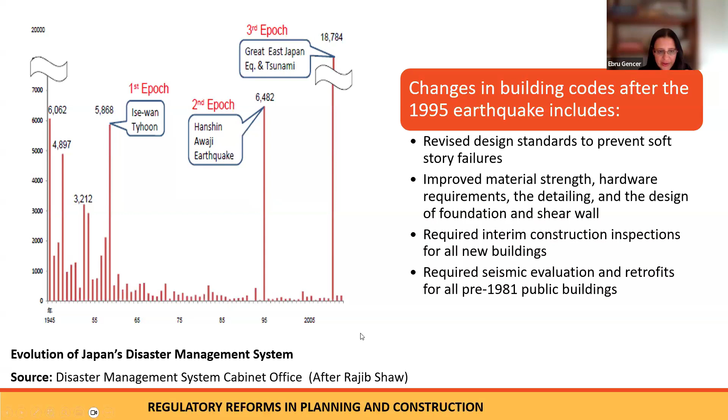There's always some learning and what it means. The institutional structures change. There are regulatory reforms, including building codes, urban planning, and so forth. So the first thing they did after the 1995 earthquake was revisions in building codes and institutional and regulatory structures.

An example of these changes for soft story failures and so forth is this municipal building. As you can see, the middle floors of the building had collapsed, and this is now the base of the building where they were able to make it more resilient.

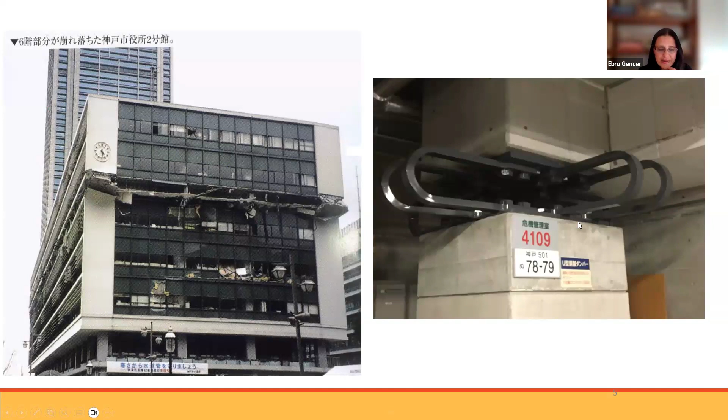Another important aspect of this reconstruction after the earthquake in Kobe was the vision, the component of governance. The mayor, just 9 days after the earthquake, was able to establish a basic vision for reconstruction for the city. I think that's a very important issue.

They wanted to build back better, not just reconstruct Kobe as it was before. With this vision, they really wanted to transform the city and have an idea of what type of city they wanted in the future. They wanted Kobe to be safe, to attract both local and international finance and collaboration, and for the city to be vital while believing in cooperation.

This cooperation wasn't just with international organizations and other partners - they said the multi-stakeholder component was really important for them. They wanted to involve communities in the planning process.

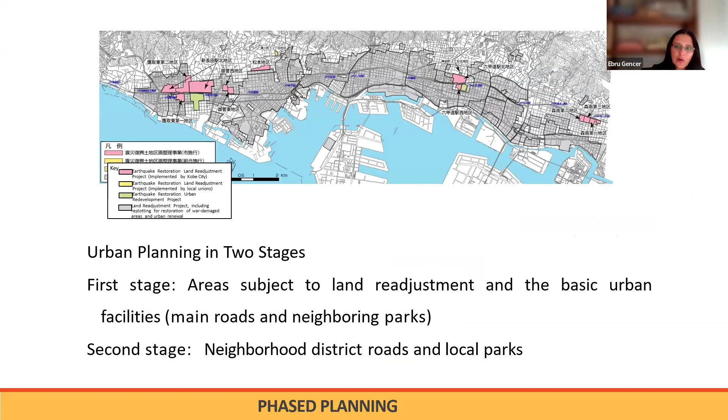For the urban planning of Kobe after the earthquake, they did a phased planning process. They started with infrastructure, since highways and so forth had collapsed, beginning with infrastructure development and land readjustment as the first phase. The second phase focused on more local parts, neighborhood districts, and so forth.

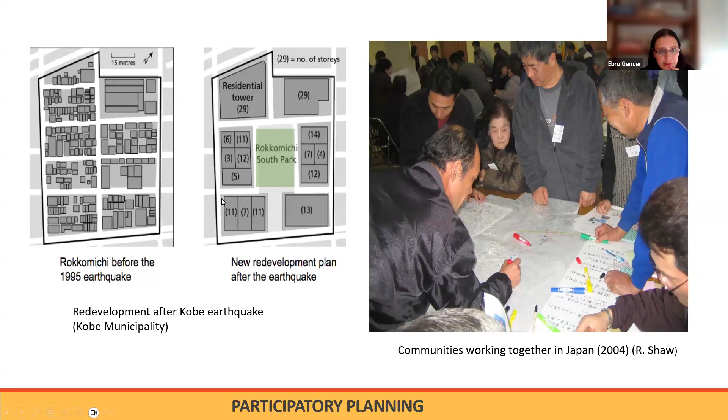An important aspect of this planning process was that it was participatory planning, with communities working together in Japan. Here is one of the neighborhoods that had burned down because of the narrow streets and old timber houses. In the redevelopment process, the neighborhood worked together and land was given to this effort.

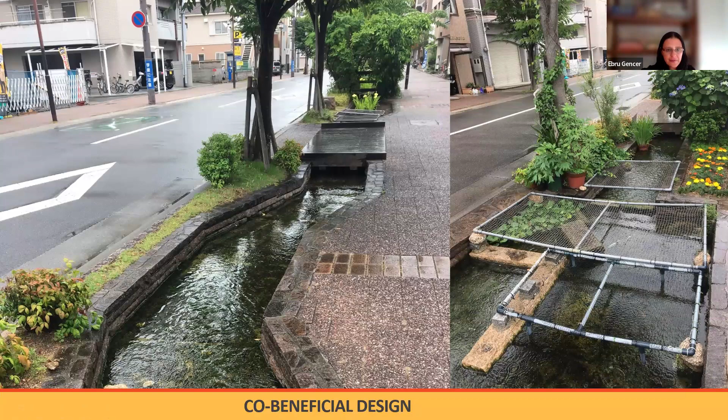So just a couple of points from this. To build back better is to understand the complex and dynamic nature of risk - this is one of the key aspects of building back better, because it's not, for instance in the context of Turkey, just about building back for earthquakes, but understanding different types of risk and different types of stresses and problems in the community.

Decision makers and policy makers need to commit to making transformative changes. However, building back better requires multi-stakeholder participation in all stages of planning, not just at the end for approval.

While there are international lessons learned, just in the Kobe example, we also need to take into consideration that each context, such as Hatay in Turkey, has different governance systems, different cultures, spatial contexts, and technical and financial capacities. So we can't just export these ideas, but we need to see how they could be fit for use in the context where we use them.

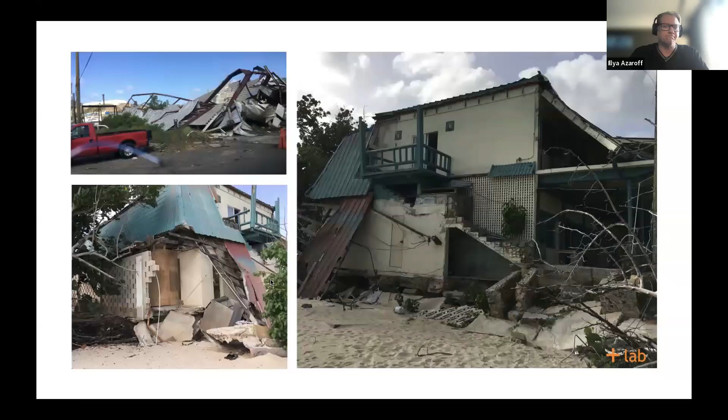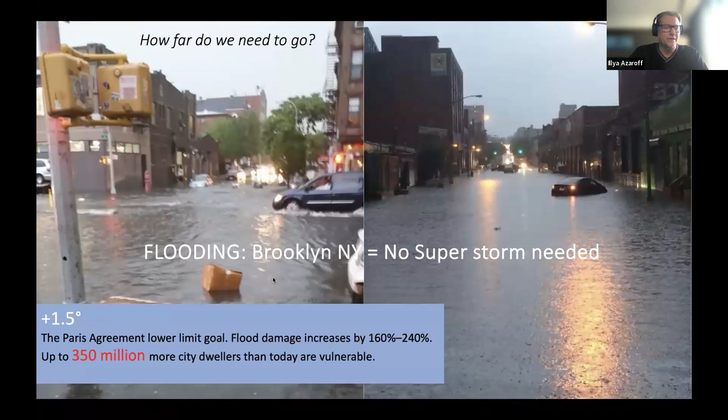I don't have to tell all of you that we're all in the same storm, and we really need to understand the nature of the storm to navigate it. This is about all hazards: enduring shocks and stresses from hurricanes and tornadoes to tropical storms, flooding, and drought, as well as addressing resource stresses that often follow a disaster, from earthquakes across the world—whether in Turkey or Nepal—with the loss of housing and infrastructure, the loss of community and livelihood, and noting that chronic events are increasingly more common, placing millions of more vulnerable people around the world at risk. We've agreed to 1.5 degrees Celsius, and that's 350 million more vulnerable people around the world. So this is the storm that we're all in.

Every minute of every day, 24 people are displaced around the world, from here in Istanbul to all across the world. Last year alone, we topped over 100 million people displaced for the very first time, including the folks in Turkey. That was at a total cost of $236 billion just last year.

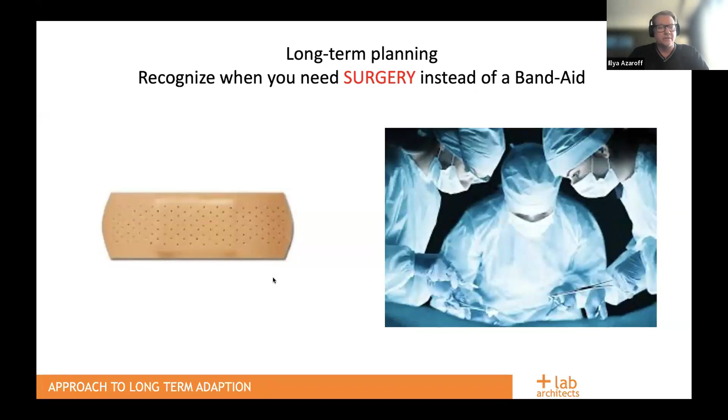I was asked to reflect a little bit on the recovery after the 2023 earthquakes in Turkey. There's a great deal of good work going on, creating temporary shelter for people and trying to bring cities back very rapidly. But sometimes rapidly gives us serious issues later on. This is the first disconnect in understanding two serious things, some of which were alluded to in the first speaker's information. We need to recognize the difference between Band-Aids and major surgery—this work needs to understand that difference, and I'll talk a little about it.

The second issue is healing versus curing. I consider this the most critical difference between success and failure in post-disaster recovery. Healing is focused on resolving the cause of the problems, while curing is managing or resolving the symptoms. How do we build a better future if we are only focused on curing—replacing a house or a bridge much the same way they were before? That's the reason we're talking about building back better.

When we act following a disaster, we must be prepared to meet all 7 community lifelines to maintain true community: safety and shelter, food, water, medical and health, energy, communication, transportation, and hazardous materials—looking at it holistically. When we plan and rebuild, we need to build resilient communities that can adapt and thrive into the future, going beyond where they were before. There's a reason they failed based on shocks and stresses. So how do we prepare the next city to be much more resilient?

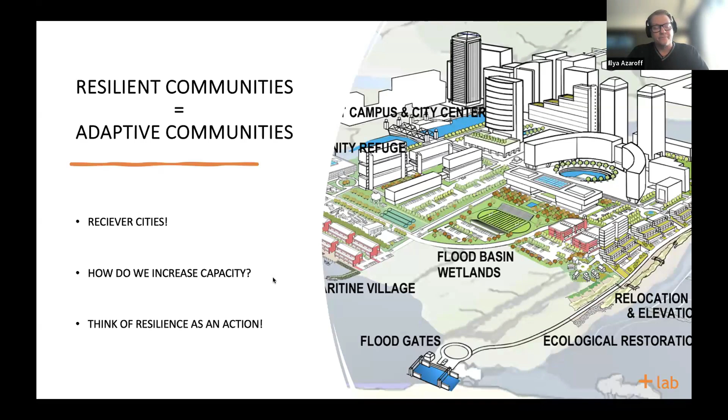Any urban planning and recovery must be holistic, cross-cutting all the sectors as well as the SDGs. These are the SDGs that Turkey has committed to, and I don't see this happening to a high degree today in Turkey. Civil society is not being truly leveraged to create new solutions. The Sustainable Development Goals are this global call to action.

And this is the opportunity that we must address those as well as building back better. And to really give you an example, Japan comes to mind, and it's a different example than it was shown before.

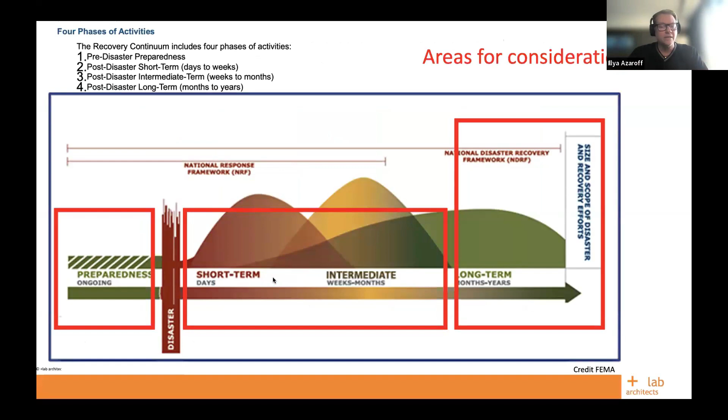Because all phases of preparedness and recovery require a complete understanding of when major surgery is needed and when healing versus curing is necessary. The Japanese are very much prepared, following Kobe, to respond to all 7 community lifelines when a disaster occurs, not just housing, but temporary bus stops, temporary bus routes, temporary markets, temporary hotels, information centers, bathhouses, community centers, all pre-planned using baseball fields, parking lots, and other elements.

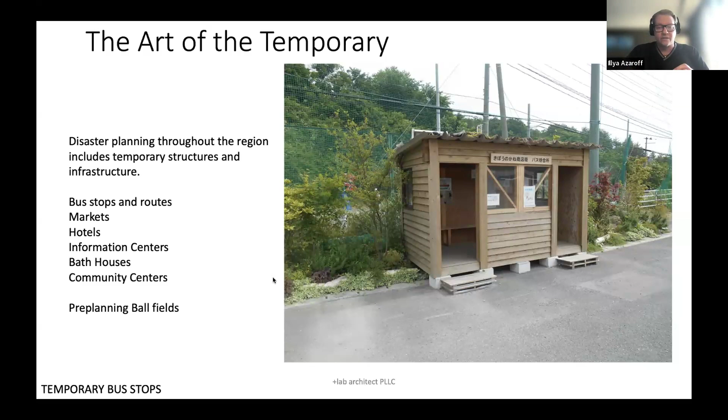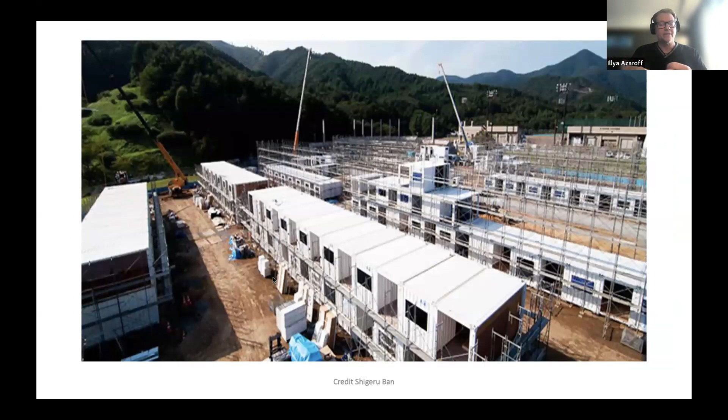So this pre-planning and an understanding of how we continue as a community is the rationale the Japanese have adopted. When displacement and relocation occurs, people and families are displaced together. What I mean by that: if you are displaced in your neighborhood, you're asked to list the 10 families nearest you when you go to the displacement center. So they quickly organize to displace all families from similar neighborhoods, maintaining social structures, friendships, and support. Can you imagine that my child's babysitter was displaced with us? Think about that - that is part of moving towards healing and an understanding of social systems.

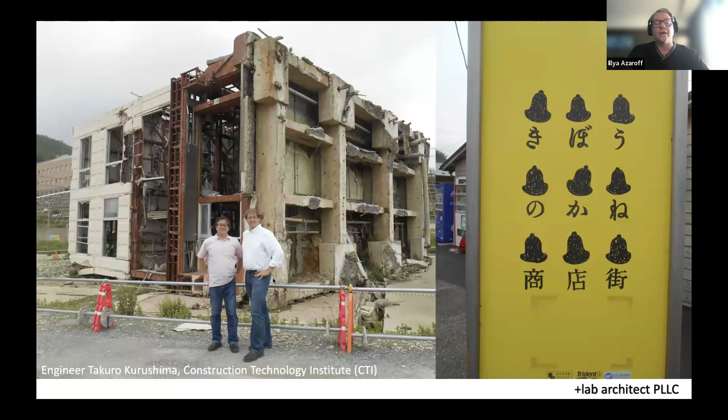And real surgery is to rethink cities and towns, not to repeat the mistakes of the past, and to address the issues of the future - that's where we're going. Onagawa, a very small town, is one of many examples: replanning entire cities and towns and relocating them for future life safety, while maintaining history, culture, and social resilience, is really extraordinary following the Tohoku disaster.

So here's just a brief timeline. For Onagawa, a complete reshaping of the surrounding mountains was needed to relocate all housing up and out of tsunami zones for the future city. They also took the tops of those mountains and infilled the former town center to elevate the area, creating a new commercial zone with layers of resilience and infrastructure much more risk averse to future earthquakes and tsunamis.

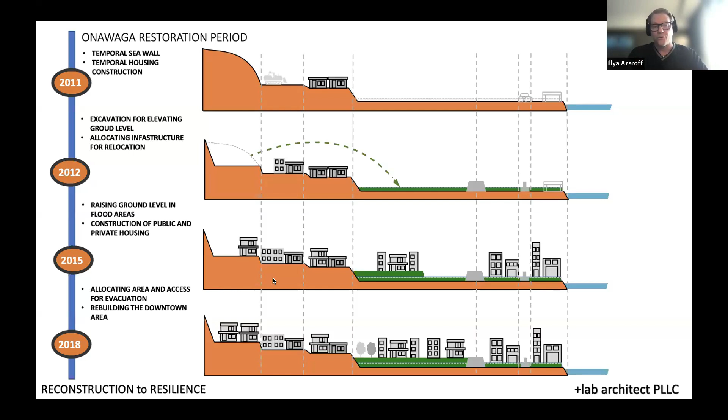In fact, underneath the entire base plane of the town, they put isolators through the whole town, so the entire town will move with earthquakes without taking major damage. So that's a brief example of what I mean by major surgery with some of the social context.

So elders organized 330 events and welcomed more than 11,000 visitors to the Ibasho cafes, integrating activities with local schools and temporary housing communities. They became the community activist site. Think about that - but it's also rooted in a cultural context that's really necessary for everyone to recognize, adopt, and make their own.

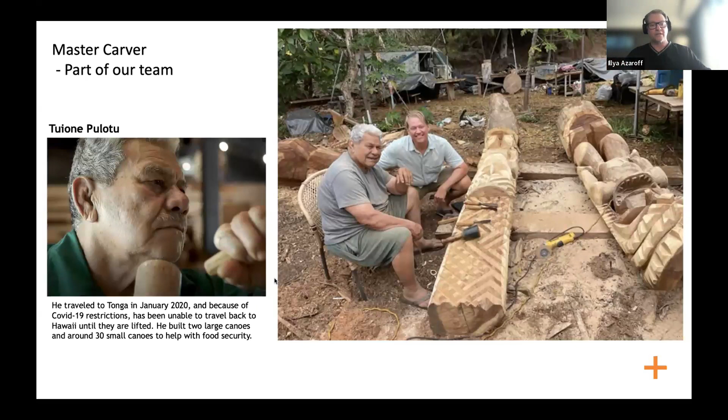Local artisans and skilled laborers, as I mentioned, are part of your team, bringing cultural practice and skills, but also maintaining a sense of place and historic context. This is Tuione, someone I work with. He's part of my design team in the Pacific, one of the master carvers, and he's starting a carving school inside of our projects in some of the buildings we're creating, noting that there are no jobs for younger people and this is a dying art. So this is part of the resuscitation and regeneration taking place.

Also seek out inspirational leaders, even if they're not from where you are doing the work, learning from their practices and examples.

And did I say community? Yes, I'm going to say community one more time because that's what's missing in a lot of what's happening in Turkey. The most satisfying part about expanding your design team with community is that you expand your family and knowledge of indigenous wisdom, of local people who understand place better than you ever could. They bring to the project - you're mining out the resilient solutions that already exist within the community, empowering them to do the work necessary to go forward. All disasters are local, all responses are local.

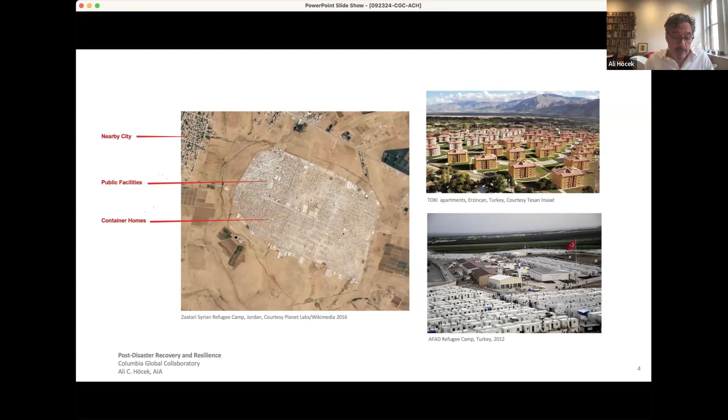As TOKİ, the Turkish government housing agency, rushed to erect temporary settlements and build public housing at a massive scale, it created a second disaster. These container settlements and apartment blocks lacked the public spaces needed for communities to heal, recover, and prepare for future crises. The left photo shows a camp in Jordan, and the bottom right is a settlement in Turkey, both using the same planning approach of repeating units and centralized public facilities. The rendering of permanent TOKİ housing on the top right adds little difference to these.

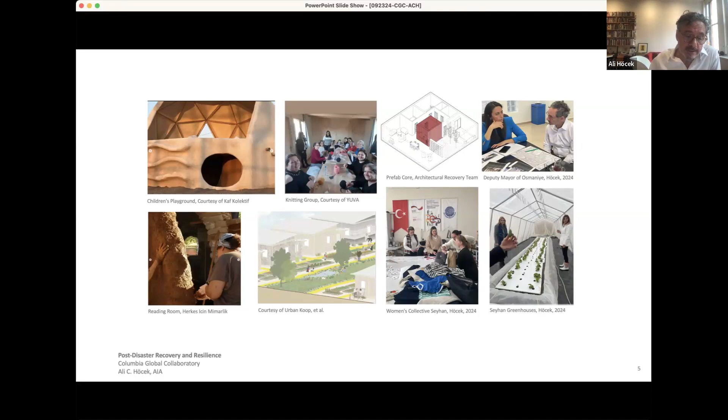While resilience and recovery efforts are partly funded from the top down, a significant portion of the work is driven from the bottom up by municipal initiatives, community groups, informal collectives, NGOs, and individuals. Shown here is some of the work done by the people we've met and continue to engage with, offering innovative and creative solutions as alternatives to prevailing practices.

With Donna, I will present in more detail our work on urban resilience parks and networks to the American Society of Landscape Architects next month in DC. Contemporary Japanese disaster prevention parks function in a similar manner to the hiyokechi. They offer leisure activities in normal times while also delivering information and preparedness training. In a disaster, they serve as emergency facilities, converting manhole covers to toilets, benches to cooking grills, as Ebru has shown, and park pavilions to shelters.

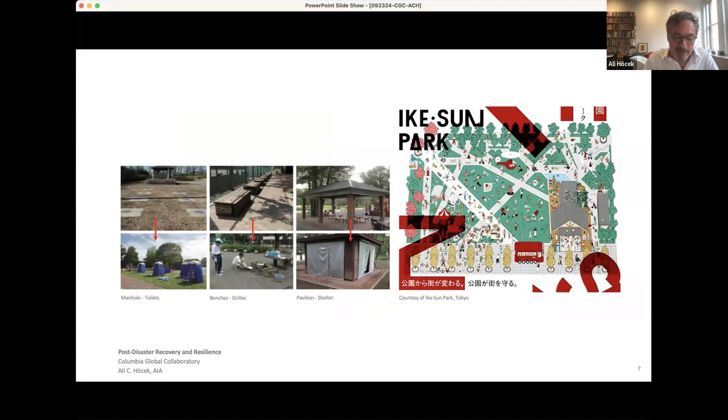Integrated into their design are additional features that serve in the event of an emergency. These include white oak trees to act as fire breaks, paved pedestrian paths capable of supporting heavy vehicles, and surfaces suitable for helicopter landings. As we have conceived it, playing fields and cafes may be designed to convert into spaces of food distribution, emergency shelters, or medical facilities.

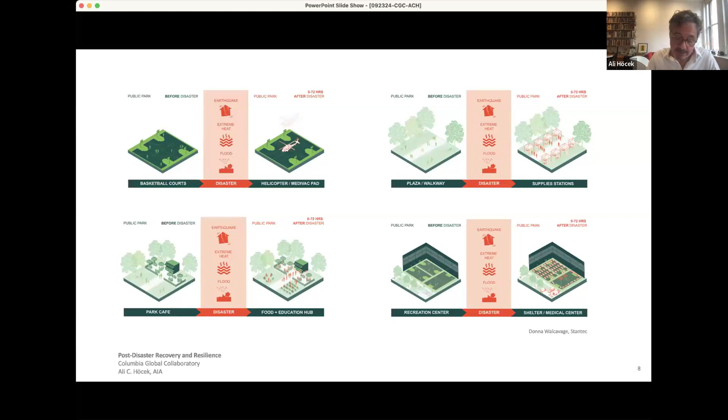In Turkey, a progressive municipality in Adana Seyhan was able to provide support to badly impacted neighboring cities. Among them is a city-supported women's collective. This group of women, many of whom are Syrian refugees, recognized that women in the affected regions were without essential personal items. They sewed undergarments, fabricated sanitary napkins, and delivered these along with other necessities to women in temporary settlements, effectively addressing a critical gap in the supply of donated personal items.

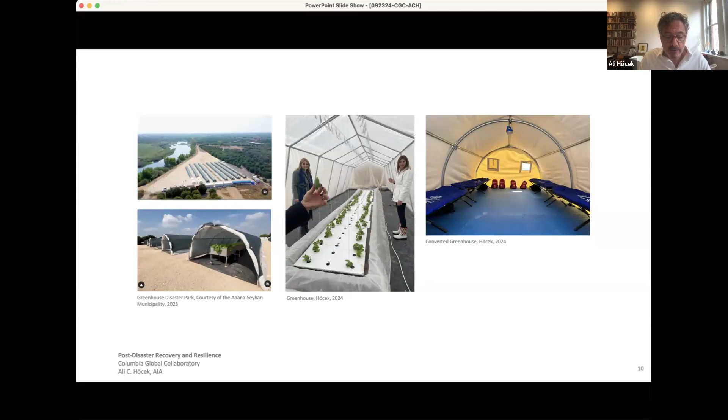In a similar vein to the convertibility of the Japanese parks, the Adana Seyhan municipality set up a greenhouse park about 20 minutes south of the city. The project was developed together with Ülge Uğurlu of the Dutch Collective of Municipalities, VNG International. The greenhouses are used to grow plants unique to the area, which are sold in the city. During a disaster, however, the greenhouse structures are quickly modified and converted to shelters for families.

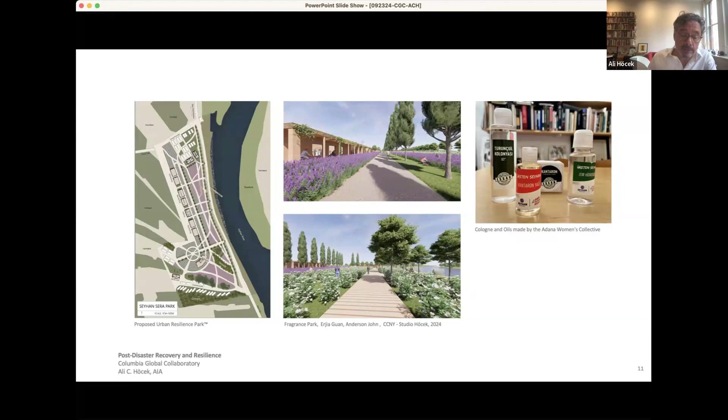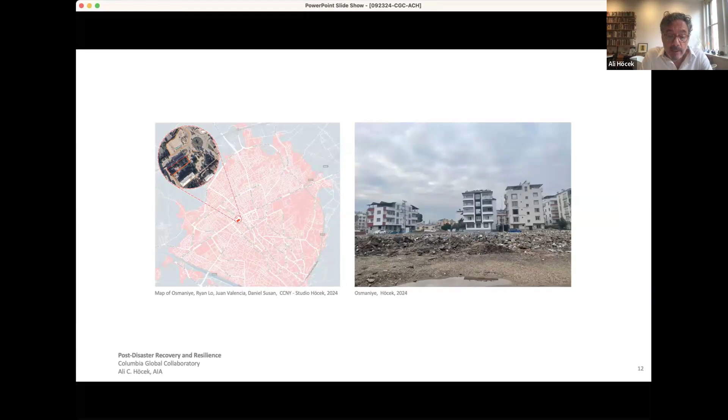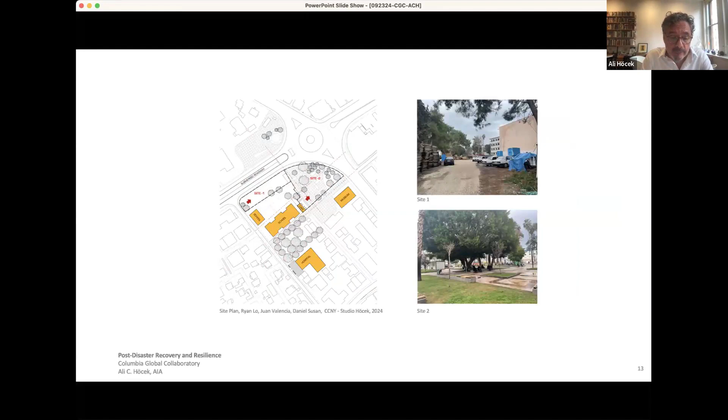When we met with the deputy mayor of Osmaniye, a city heavily damaged by the earthquakes, she immediately recognized the benefits of an urban resilience park as part of a network of facilities and proposed a site that might be used in this way. The site shown here consists of two lots: one a quarter-round popular park with residents, and the other a rectangular lot currently used for parking. They are located near a school, hospital, cafe, and museum, making them ideal for creating supporting networks.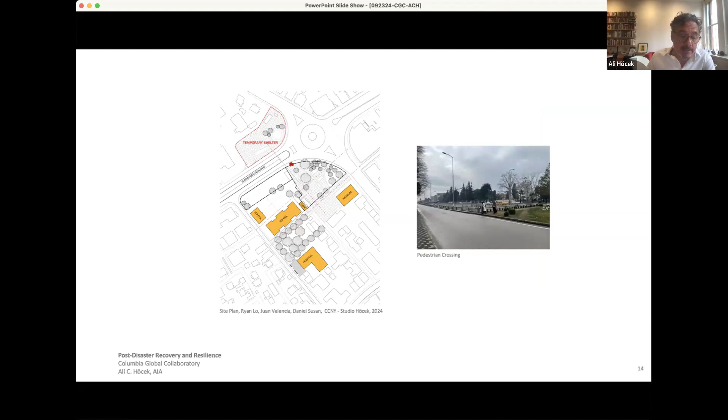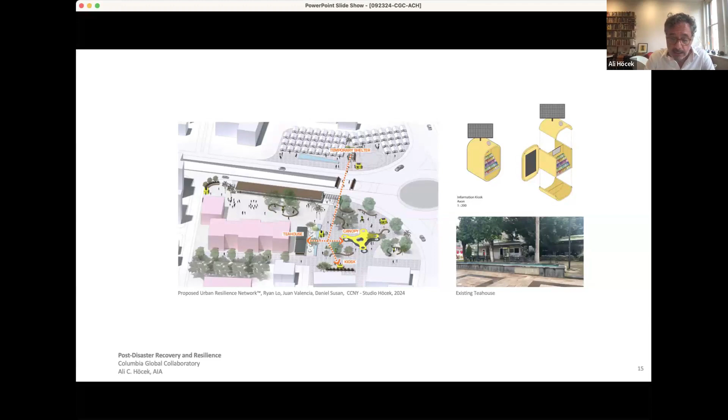Also considered part of this network is an open plaza to the north of the park, which the city had temporarily used to house displaced families after the earthquakes. Although the temporary settlement has been removed, in an event, the city would again use the plaza in a similar capacity. The student proposal for the site demonstrates how, if shelters were set up again in the adjacent plaza, refugees could receive critical information from kiosks in the park and connect with one another under the shade of a large canopy. The existing tea house could also serve this purpose and be used for food distribution, unlike the Yabasho cafe that Illya just showed us.

During normal times, kiosks in the park would be managed by the hospital to offer public training in basic medical skills like CPR or setting broken bones. In emergencies, the kiosks may be appropriated by hospital staff to handle overflow and minor injuries and disseminate urgent care information and supplies.

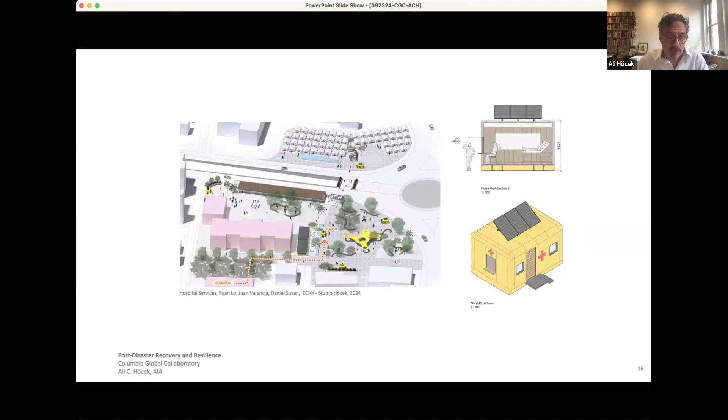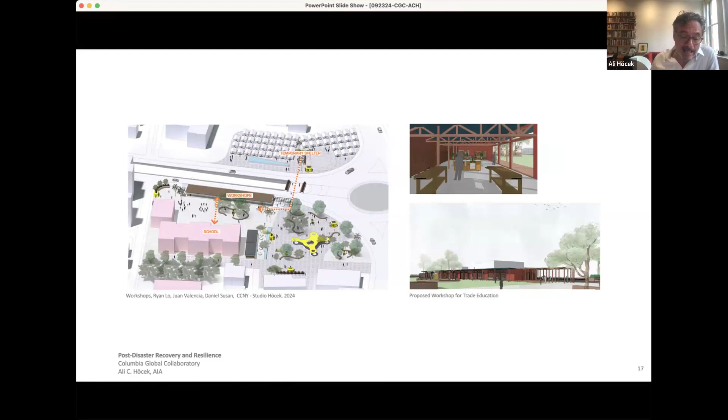A workshop building is also proposed where high school students can learn basic skills in plumbing and woodworking. In a crisis when skilled labor is lacking, these workshops would support recovery efforts by providing repair services, clothing, and food distribution. Classes can also be extended to the community, taught by local professionals and retirees, further activating interactions among different groups within the city.

By activating the park in these ways during normal times, it becomes a recognized destination associated with resilience. As a result, the Urban Resilience Park will naturally attract community members during a crisis, enabling quicker access to information and recovery efforts.

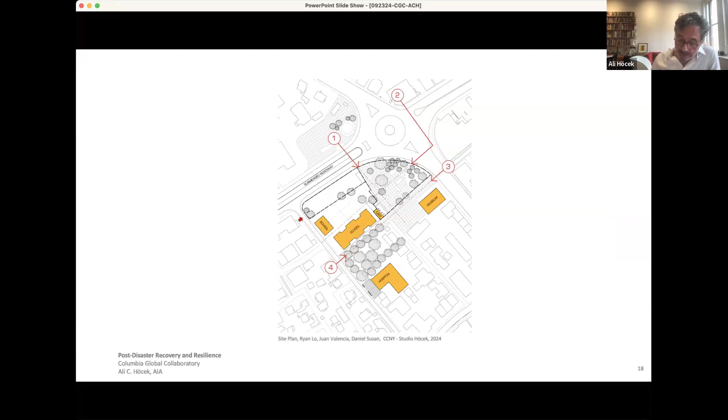In this final part, I will show you several ongoing design efforts by students, small design offices, and collectives conducting community workshops and building in the region, along with similar work from my own firm. The common focus in all of these efforts is building social capital in recovery.

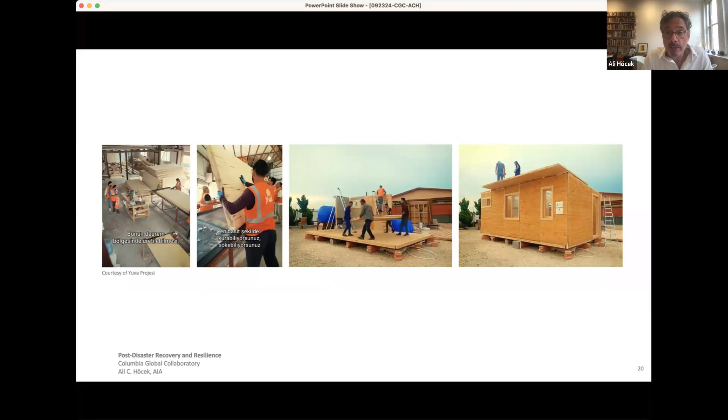Responding to the need for public spaces for healing, education, music, and crafts, Yuva, a group of architects and filmmakers, worked together to create a wooden panelized system immediately after the earthquakes. The system uses the efficiencies learned by set building in the film industry. Yuva has since set up shops for local fabrication and continues to build in the region, addressing both social and economic vulnerabilities.

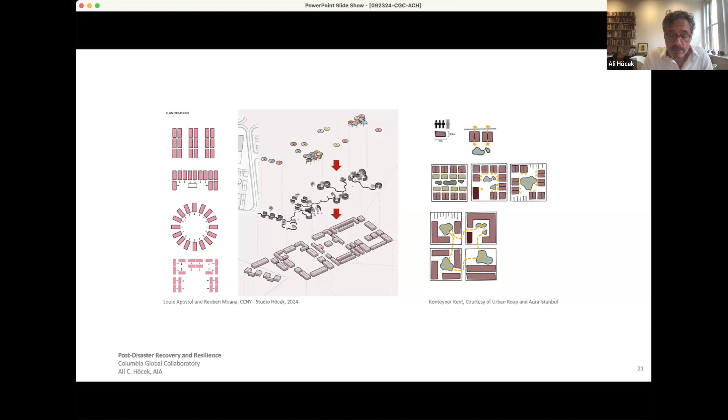Urban Koop, an urban design firm in Istanbul, addressed the social challenges of the temporary container settlements I presented earlier. They reimagined the layout of container units to create a space for natural and social interventions. The diagrams shown here, created by my students and Urban Koop, illustrate possible reconfigurations of repeating units commonly seen in temporary settlements, grouping them into clusters. These clusters form neighborhoods where social activities can occur, such as parks, vegetable gardens, chicken coops, communal ovens, and other culturally shared functions.

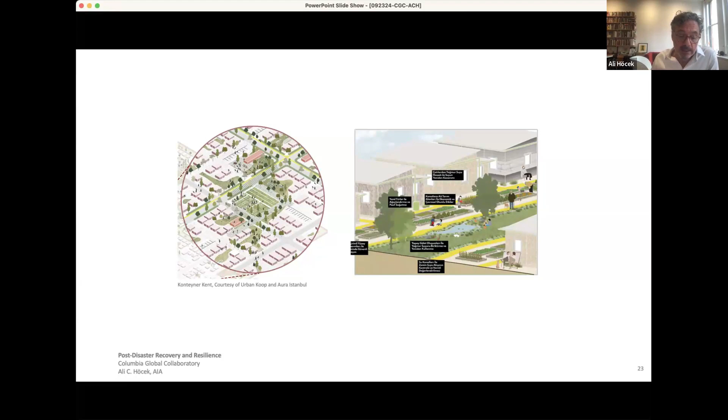In their proposal, a green corridor meanders through neighborhoods, bridging social interactions among them. Shared programs that, rather than being isolated to one area, are now distributed throughout the settlement. Each function brings further identity to the neighborhood, and each community garden brings in the potential of growing foods, rainwater collection, passive cooling, and other ameliorations. We are currently coordinating with Urban Koop to present guidelines around urban resilience networks to municipalities in a proposed 2025 conference in Turkey.

This last project, Deploy, is also by my firm. The patent-pending design uses container-sized units and an inflatable roof to quickly assemble a structure that can be used in a variety of locations to prepare a community before an event, as a facility for community recovery programs, or to provide space for informal social interactions.

In conclusion, CARRRE and the various projects we've discussed today highlight the power of collective action and the importance of designing for resilience in both everyday life and during crises. By listening to local needs, leveraging existing resources, and fostering networks that empower communities through social capital, we can create solutions that go beyond short-term or simply reactive fixes.

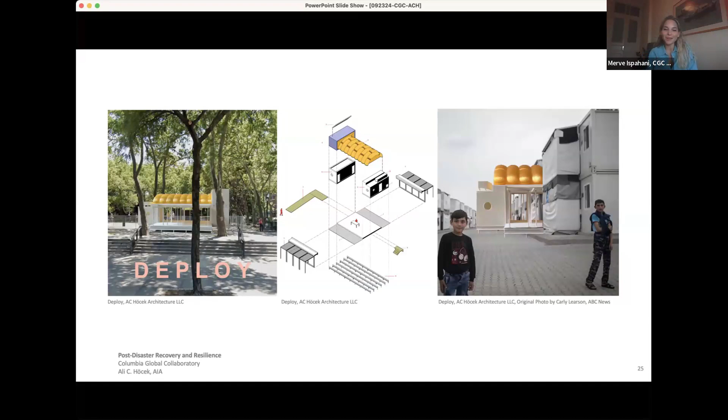So Ebru, you mentioned about the transformative nature of rebuilding and how we should break the cycle in the reconstruction phase so that we can build better.

Illya, you showed us illuminating examples from Onagawa, where entire towns were moved so communities were kept together, and the importance of multi-sector reconstruction efforts where communities are part of these efforts. And Ali, you highlighted comprehensive approaches to recovery and resilience, in contrast to rushed public housing projects in earthquake-hit regions in Turkey, which led to a second disaster. There's so much to learn, and no one-fit-for-all recipe for healing, to use your terminology. But could you all reflect on the peculiarities of the case of Turkey, this particular disaster, and the main challenges in cooperation between different sectors, public and private, given that you've visited the earthquake regions?